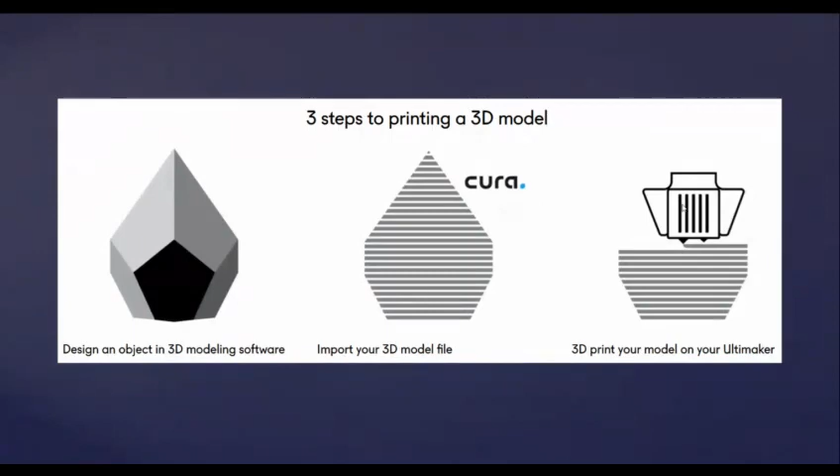Let me move on. I hope these are the basic things of the 3D printing idea, just to give a brief overview. This is one such model, a model of one 3D printer I have.

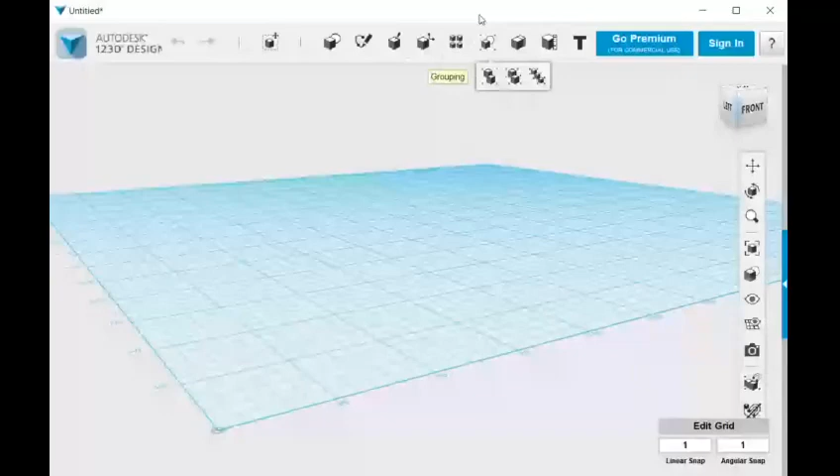So this is the software. I'm not sharing my entire desktop because it's full of windows open, and I don't want to create a mess in the webinar. So I will share only the file that is required. This is actually a software for CAD, computer aided design. It's a free software where you can try it out.

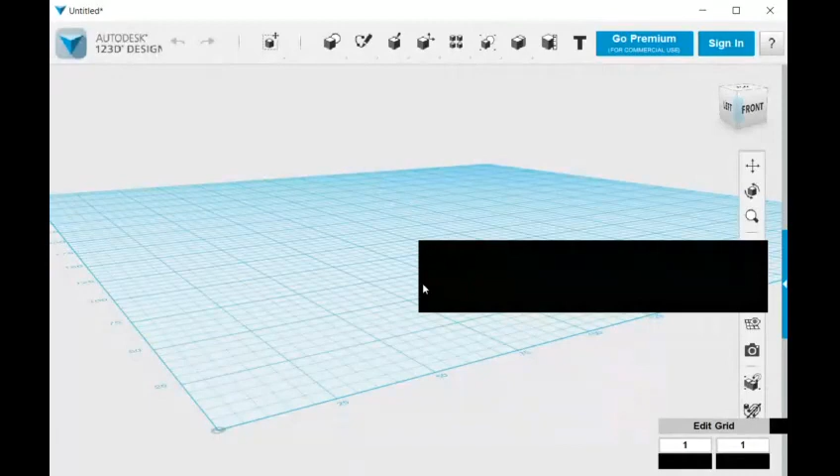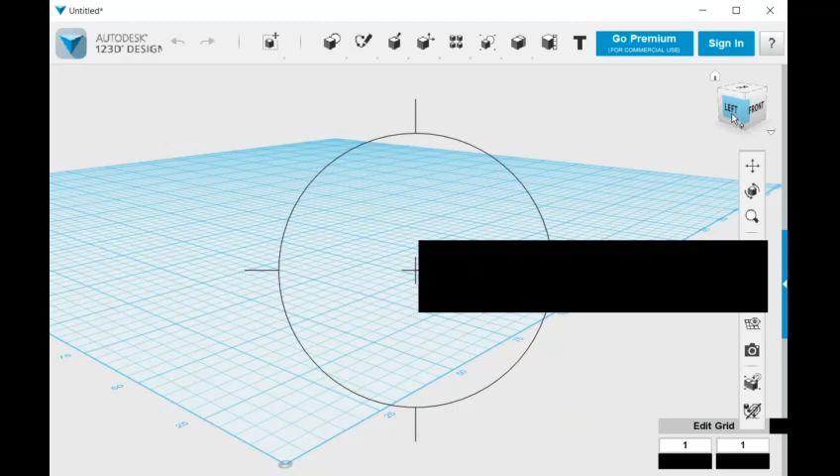If you see this, we can see there's a small cube here. I hope my mouse is visible as well. This cube is actually the perspective view of your 3D printing model. We can have a separate session on the CAD design of a 3D model, but here I will briefly elaborate on the tools so you can manipulate the STL files you download from the net. So this is the left view - if you click this, it changes directly to the left. And if you click home, it goes to the perspective view where you can see the 3D model axes.

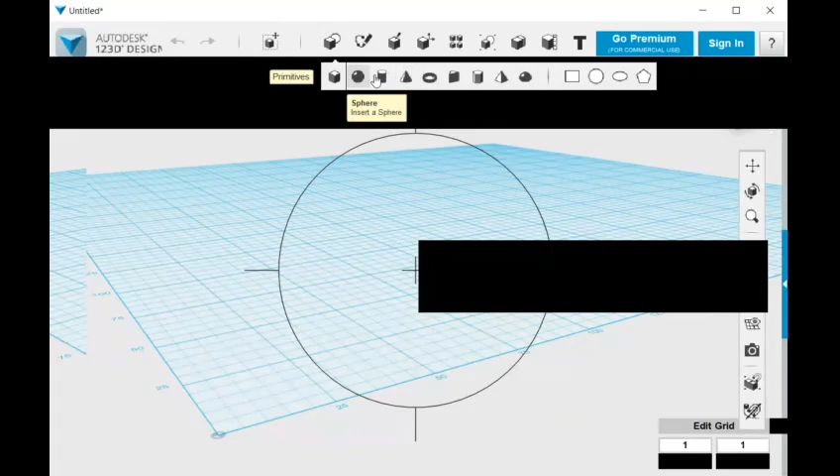These are the options where you can draw particular diagrams, like a box, sphere, and other diagrams. Let me show you a particular thing - I'll just place a box here. So here you can just see the 3D model.

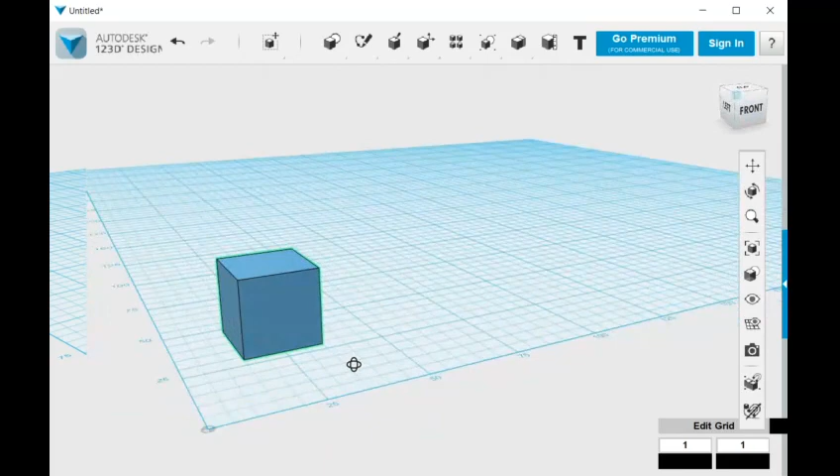The basic thing about having this software with you is that sometimes the STL file you download from the net won't be right away compatible for your application, because the dimensions used by the person on the web will be totally different. So it's not advisable to print that particular 3D model right away, because you need to identify the dimensions the person has already designed and the dimensions you require. That's the main important thing I came to experience.

The beauty of this software is that it comes with the dimensions inside as well. So if you have an STL file, first you can place it right away on this screen and check whether it meets your required dimensions. I had the experience of downloading a file, and because of enthusiasm when I learned 3D printing in late 2016, I downloaded the file and directly printed it. But after the printed material came, it was actually very small - I couldn't even place one servo motor to control it.

So that is a file I downloaded for a robot, especially a spider robot. So that is the main thing. We often make mistakes, and with the mistakes we improvise. So this is my suggestion to you all.

The next thing is that after the session, you will be able to download the STL files required for your application, from your ham project, DIY project, do-it-yourself project. The first thing I recommend is you download those files, put them in Autodesk 123D Design and check the dimensions. Once it is okay, you export this file as an STL file, or you can save this file.

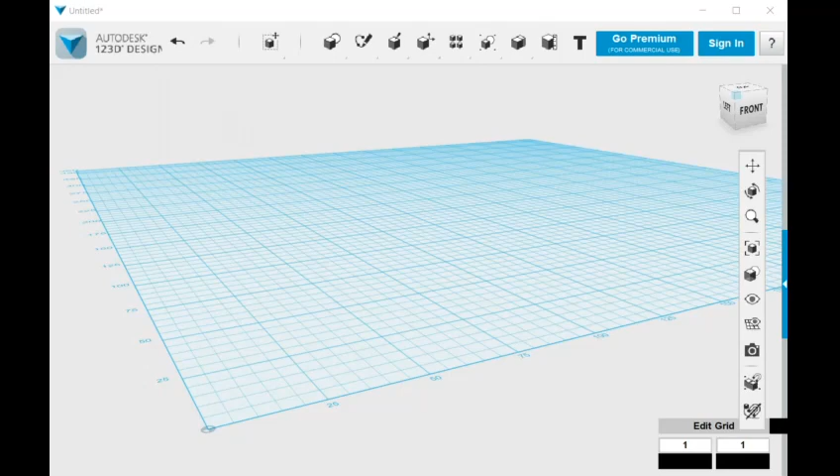So you can just click here and a window opens, and I'm going to save here. You can see that it's in 123D model format. So these are the basic things you can do. So I will just close it. I will try to copy an STL file I have. I have a Morse file. Let me check.

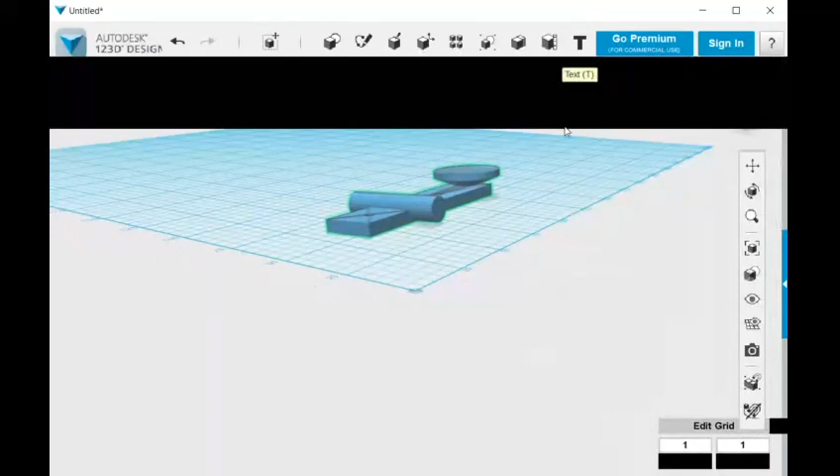Okay. So I hope you know this file. I hope you are able to appreciate what this is. Actually, it's a Morse key, the key we are going to press. I hope it is visible. So this is the Morse key where you are going to press this button here so that it moves. You can see that this file is already available here.

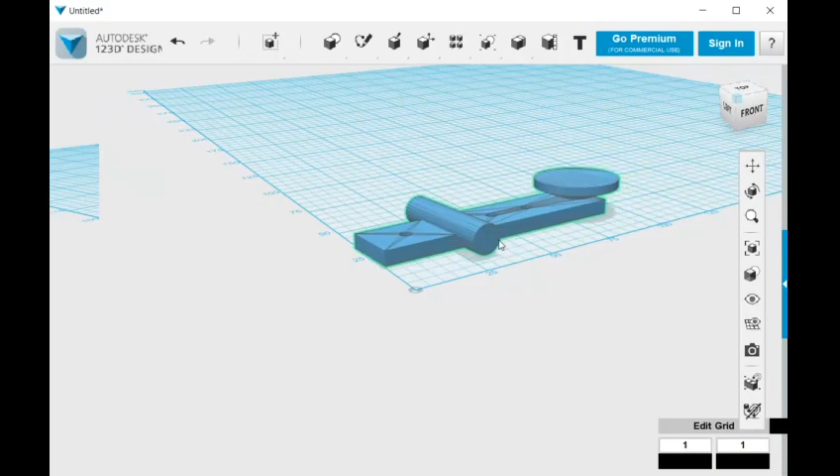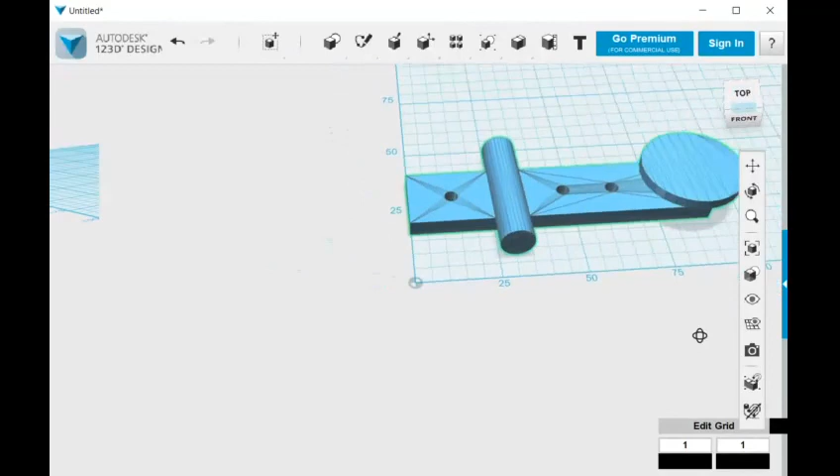If I look closely, if I place it here for your reference, this is my 0, and you can see that it's all in millimeters. You can see it's slightly above 75 here. But for the total size, if you see the cylinder, you can see the size as well. Okay, let me see. If I see the top view, I can click here as well. So you can see this is my file size. So you can measure it right away using this software.

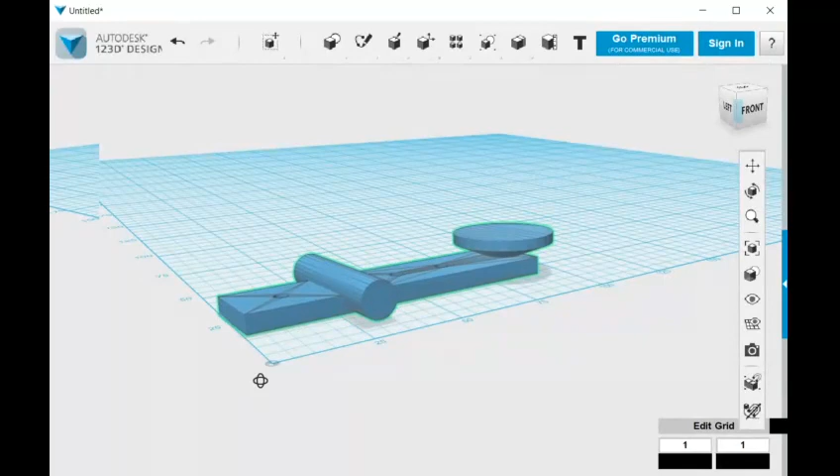With the perspective view, when you see the shadow, I thought it's only 100 millimeters, which is 10 centimeters. But if I move this closer and look at the left side, I can see that it's actually quite tilted. You can see it is quite tilted here, a small angle change. So if you move to the top portion, you can see that it's slightly above 100. So we can say it's actually 11, or 110 millimeters, approximately.

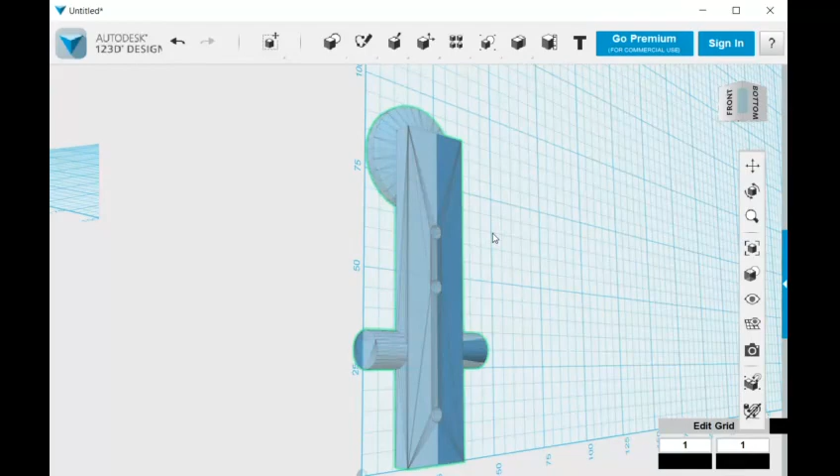So when you are going to design that Morse key, you should know that its dimension is 11 centimeters. If you are building a base which is only 8 centimeters, this won't be appropriate, because you are going to make a contact point here, and you can see it is slightly above 75. So with this software, you will be able to calculate the dimensions of STL files which you have downloaded from the net.

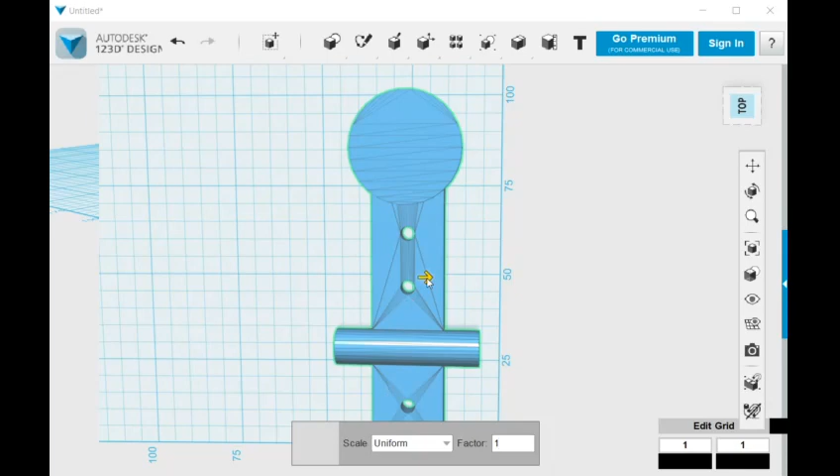What you can do is scale it. You can see the scale option here. If you click that particular icon, you can scale it. You have a lot of options where you can just click and scale. Scale means when you click it, an arrow appears, and if you drag this way it will make it bigger, and this way it will make it smaller. So this is how you can change the 3D printing structure accordingly for your project. I hope it was quite useful.

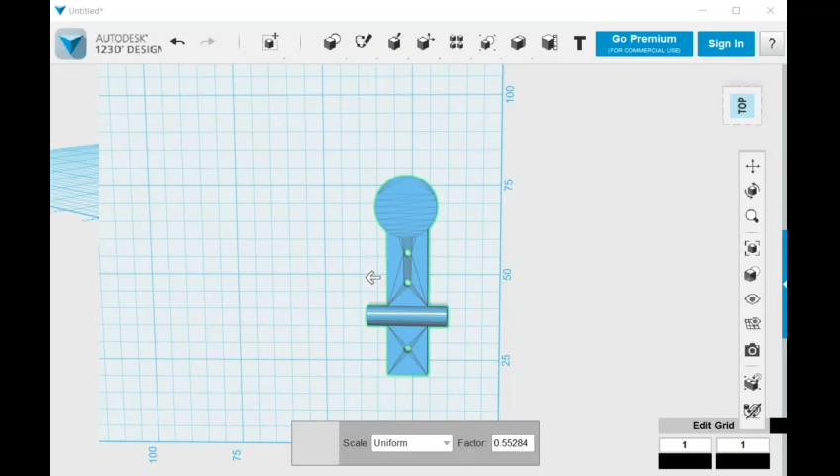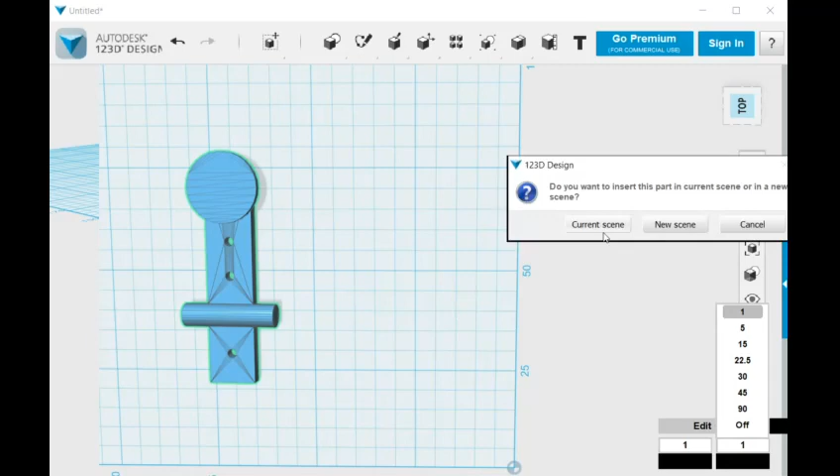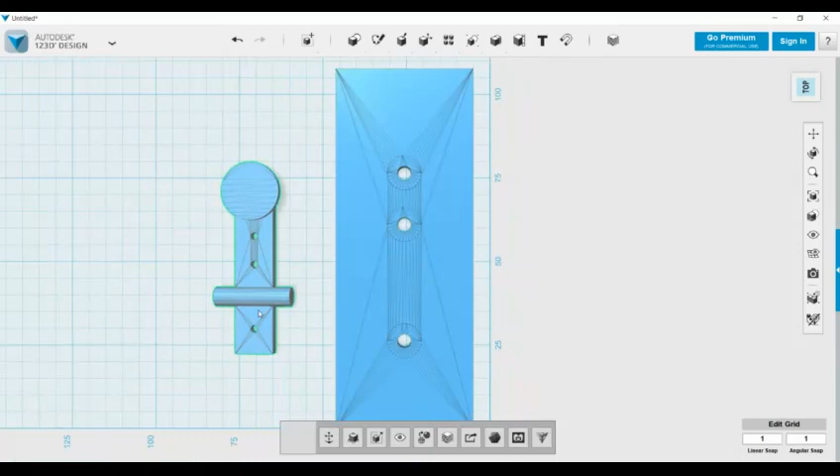This is a basic way we can use this software. I hope this is more visible now. I will repeat it again with another 3D printing model. So I will move this to the side, and I will copy the base as well. Okay. So this is the top side where I have put my base as well. Okay, since it is standard, I will put this file again as well to have a comparison.

Okay. So this is actually, I've kept it side by side in this place. So you can see that we have different holes as well, and these holes are also being matched. So what we will do is that we will print all these holes, and in these holes we will use the screw, and we will have a connector here as well. This is actually a perfect match.

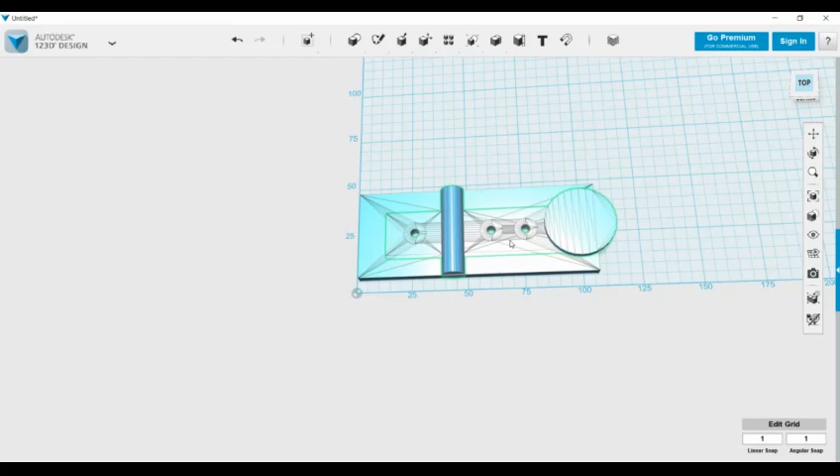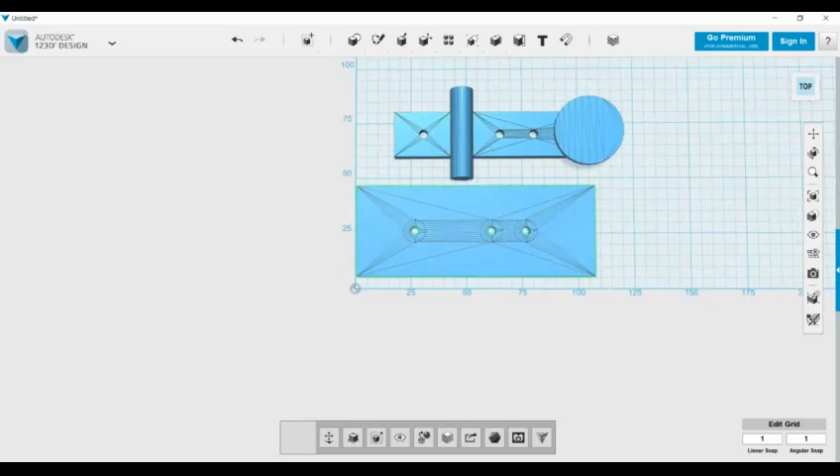Another thing is that if you are printing this model, you need to fix this plastic base over a wooden board. So if you have a wooden board which matches this size, then it's well and good. Otherwise, if you have a wooden board which is actually smaller than this size, what you can do is that you can scale it right away. I hope it's visible, or if it's small, I will just zoom it right away.

I hope it's full screen enough for your visibility. Okay, this I will put it right here, and I will just align it here. Okay, perfect. So we are placing this above this one. So if you have a wooden piece which is to be kept here, I have that diagram as well. We have already seen the 3D printed model. So if you need to place it here over the wooden body, which is actually quite smaller than this one.

Using this 123D Design, what you can do is that you can scale it. For doing that, you just click it. When you click it, a window appears here beneath it. You can see whether you can move, so the main properties will be visible, or you can scale it. Smart scale is that you can scale it section-wise. So that is another thing.

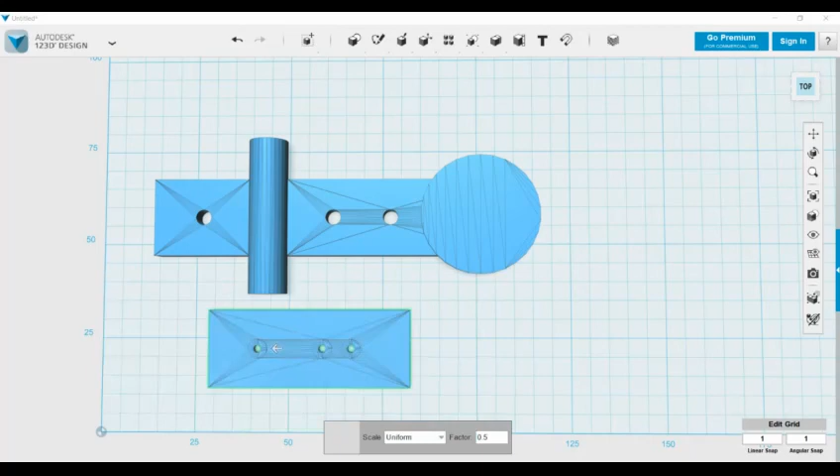If you want to uniformly scale, you can use the third option, the scale option, where you can uniformly scale it. Suppose you want to scale by a factor which is smaller, maybe half, you can type 0.5, or if you want double the size, you can just type 2. If it is 1, it means no change is happening. So you can change uniformly, or you can change non-uniformly as well, if you change the X

factor you have. What I suggest is that if you have exact dimensions, I prefer you to do this in the non-uniform way, rather than moving your mouse. If you are comfortable with that, you can move the mouse in such a way that the required dimension is met here and here. So with this, I hope you can modify your required 3D objects available from the net according to your specific needs.

I hope with this small session it's clear. I will show in the browser how to download STL files as well. But if you have an STL file, I hope it's clear that you can change that STL file to the 3D model required for implementing your small homebrewing project. If it's clear, then we will move on to Google Chrome to see how you can download those STL files for your projects. If it's yes, we will proceed with that.

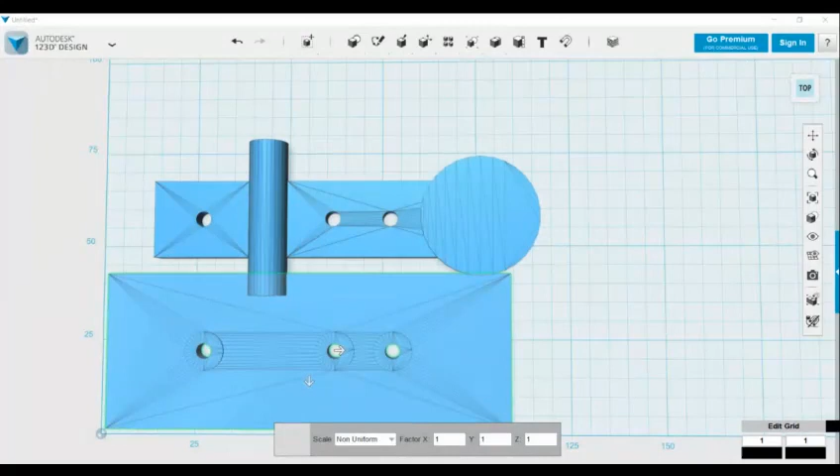Okay. So what I will do is I will share my Chrome window. Let me see. I will show it from my Google point of view. Whatever we do, we search Google, right? So I will just open an application which shows my Google. I hope you can see my Google page. Okay, it is not visible, I guess. I hope it is visible now because I can't see the software.

Okay. So here you can just search directly. What we require is STL files. So this is an STL file. You can see that we can see the STL file download. The main thing is we need to have STL files for hams, so ham radio. This is actually the common search engine that we get. This gives a general idea, or the site where you can browse all the STL files, 3D printing files for the ham radio.

Another beauty of it is that here, if you see, you have radio buttons. So if I just check it. In this session, I will elaborately explain how to search Google to find your required STL file. So here I just got a file of ham radio buttons.

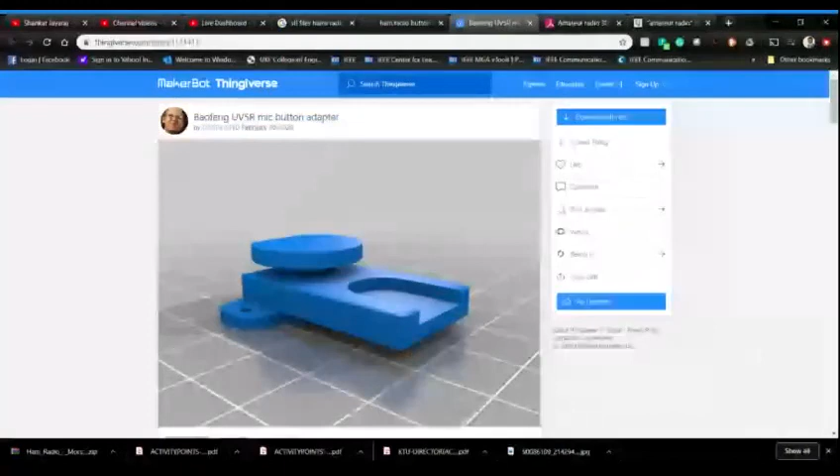So you can search many files in this web space, where you can search for the 3D printing components that are available for you. These are the basic things they have already designed there. These are the already existing components, as an overall crowdsource.

But if, in the chat window, you say that you are working on a homebrew of so and so, and you need a particular file or a 3D printing model of a particular source, then I can show you live how to search to get that particular file. If you have such, you can just comment it in chat. Then I will have a live session of how to find that particular STL file, work on 123D and how to print that in Cura. So if you put it, by the end of the session we will have that as well.

And I hope the session about searching an STL file and, with the download of the STL file, how to change the dimension according to your application, these two things are clear. I hope you can try it out after the session. If yes, then we will move on to the software printing part, where we use the 3D printing software. The software is Cura. So we will move on to that.

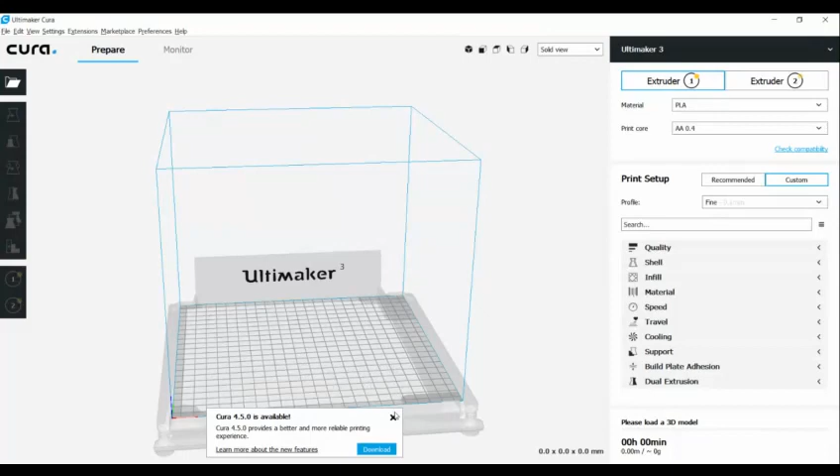So this is actually a 3D printer. You can see that I have customized this Ultimaker Cura for the Ultimaker 3. There is a different set of Ultimakers, but since I have been using the Ultimaker 3, I have set this Cura software for that one.

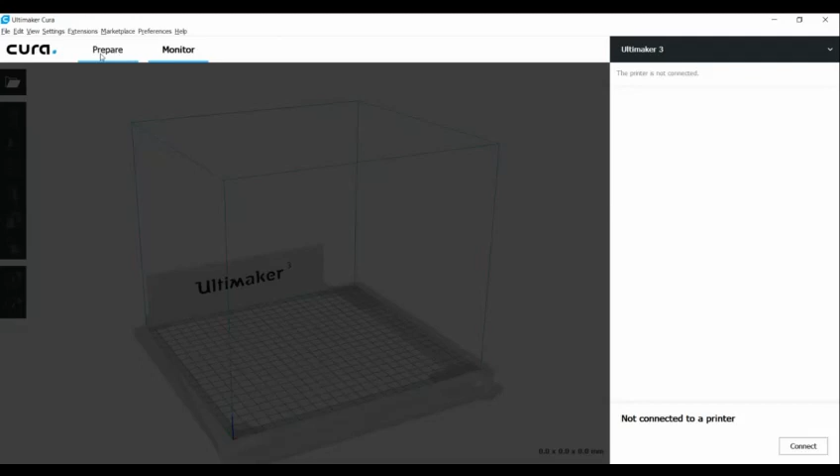So here, what you can see is that you have a right side window with a lot of features. One minute, when you switch on, you can have that option. So if you see this one, I hope it is visible. And if you see the top side, I clicked settings where you can select the printer, and I have selected Ultimaker 3. So in order to do this one, you need to add printers.

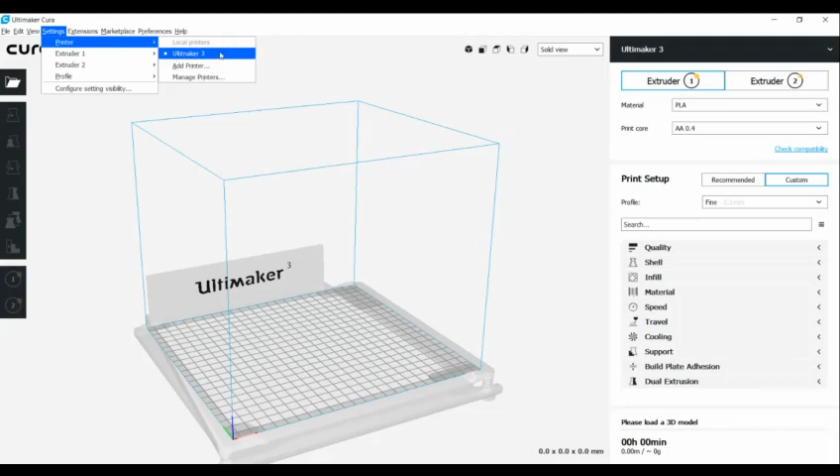So if you have a different version, you can just click add, and you have a different set of printers that is made by Ultimaker. So the latest one is Ultimaker S5. Ultimaker 3, I think it costs around 3 lakhs to 4 lakhs. And with an extra 75,000, you can get Ultimaker 3 Extended, where you get an extra dimension of 10 centimeters, so that you have a 3D structure.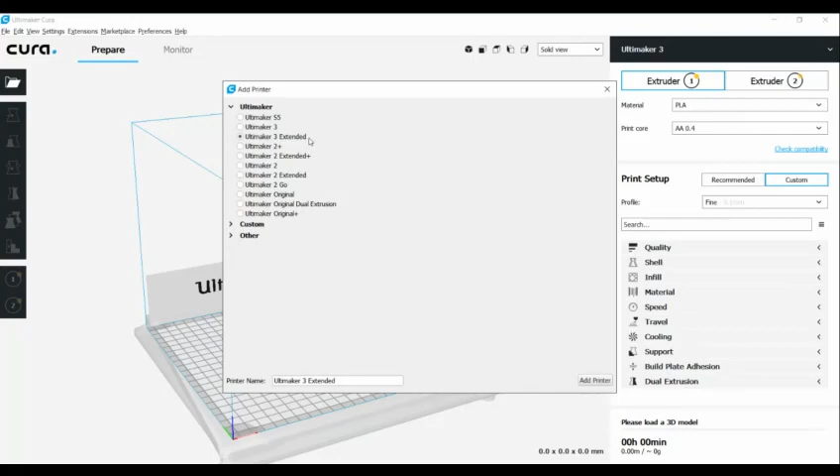Ultimaker 3 Extended means that of X, Y, Z, one varying component is Z, as its height is more, an extra 10 centimeters you get. So it costs nearly 75,000 plus over the Ultimaker 3. So today we will use this Ultimaker 3, where you use this software Cura for implementing this particular project. Let's assume that we have already designed an STL file according to our dimensions.

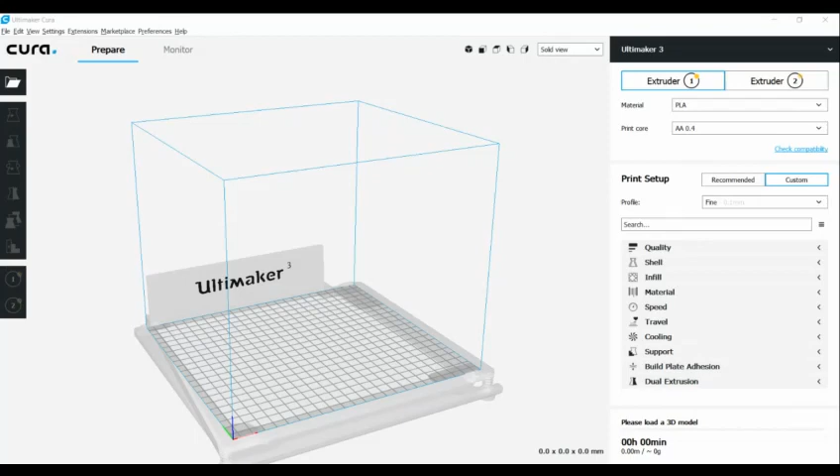So let me take that same Morse file, which I have downloaded on my Windows. I will just click and drag that particular STL file onto the Ultimaker. So what it does is that it directly takes that particular image over here. So if I zoom it, this is similar to that of 123D. The controls are the same.

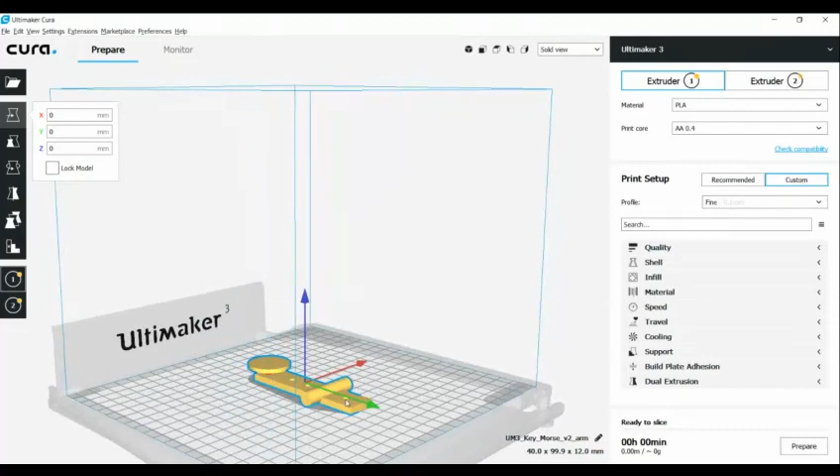You can use the right mouse key to rotate like this, and you can use the left key to select that particular thing, and you can see three axes came, X, Z and Y, with a beautiful RGB color diagram. So let's say that we have X as green, Y as red, and Z as blue. What this Ultimaker does is that if you have already placed it, and it is yellow, it is ready to print.

Suppose I move with this axis, and I'm keeping it outside the particular white area. It is not identifying the object because the object placed here is actually out of bounds, meaning out of the 3D printing area, where it doesn't identify the object to be printed.

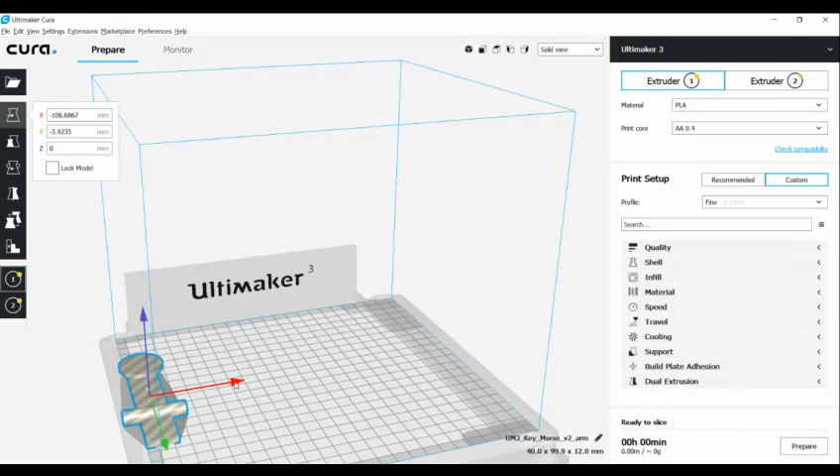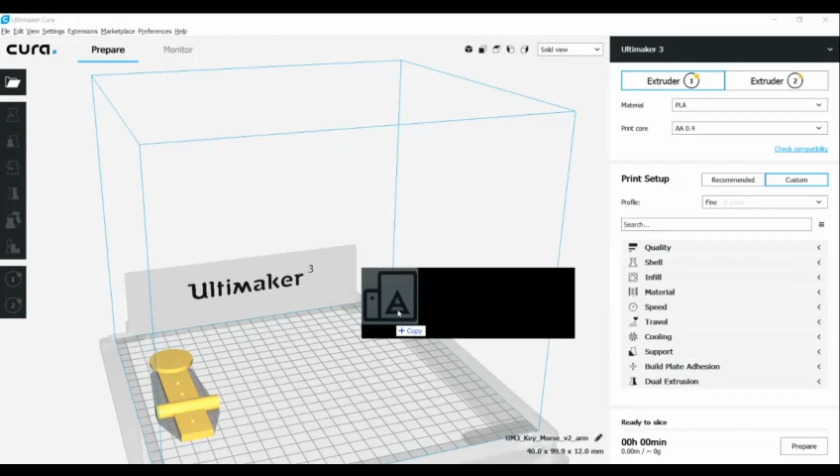So if you want to print a lot of objects, you place each object one by one. Suppose I want to print maybe 1, 2, 3, maybe 4 of these. So I will take the same file and put it again so that I can see another file also comes here. So I have kept that as well. Since I have changed it a little bit, I will use this axis alone so that each and every STL file is aligned in the same way. So I will place a lot of files.

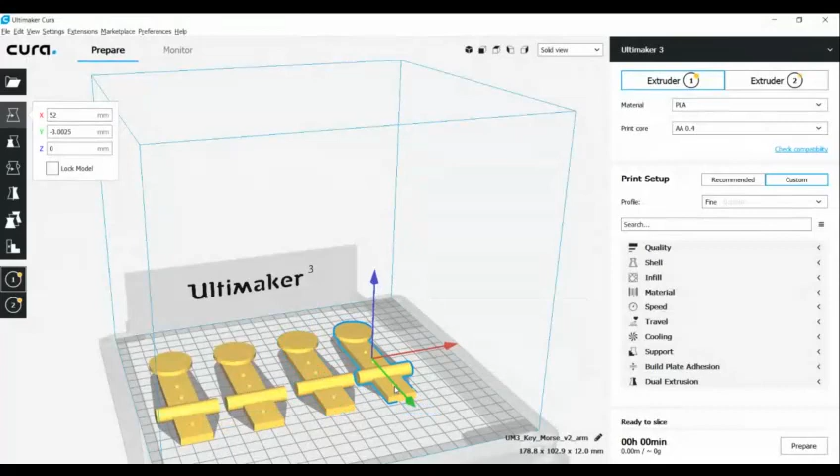So if you want to have a Morse key mass produced, or 4 of your friends have asked you to 3D print your file, you will visit your 3D printing center at the Fablab only once maybe. So during that time, you can print all these arm bases like this. Sorry, we can place these 4 arms here.

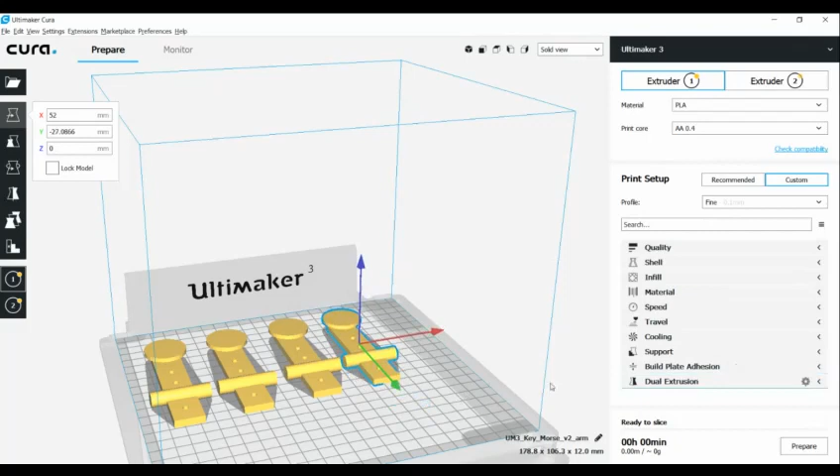If you see, we can see small spaces behind as well. So I will just put it right away so that, if possible, I can keep one more 3D printing file in the front to print right away. Since I'm having 4 arms printed, I need to have a base as well. So I've copied the base, but you can see that since there is no place here, it went outside. So I'm not able to print it.

So what I can do is move it this way so that it fits here. Okay, so I can rotate here. If I see, there is an option called rotate, where the axes are changed to circles. So we can move this according to the circles here.

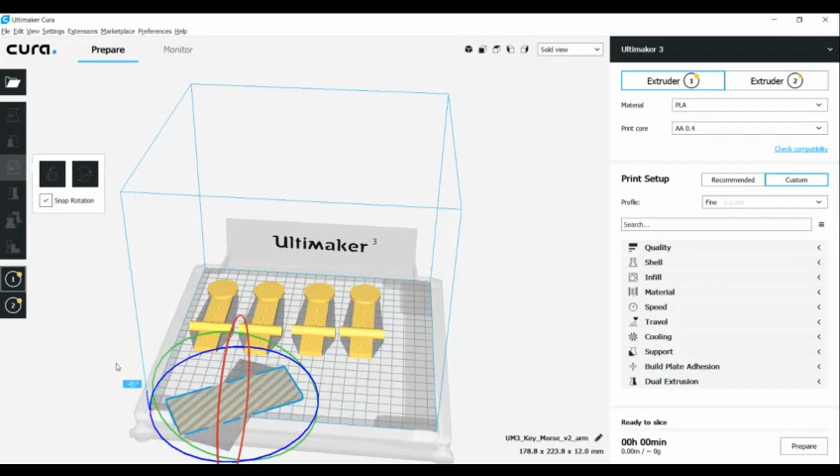So if I move the blue thing, it moves to that particular axis, and you can see it has been rotated. So now I can move it inside of this. Now this also, the base of one can be kept here as well. So this is how you place the STL file components here.

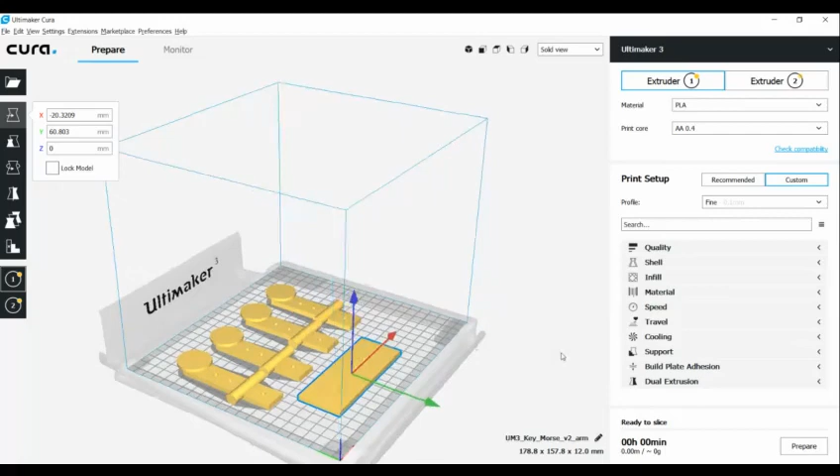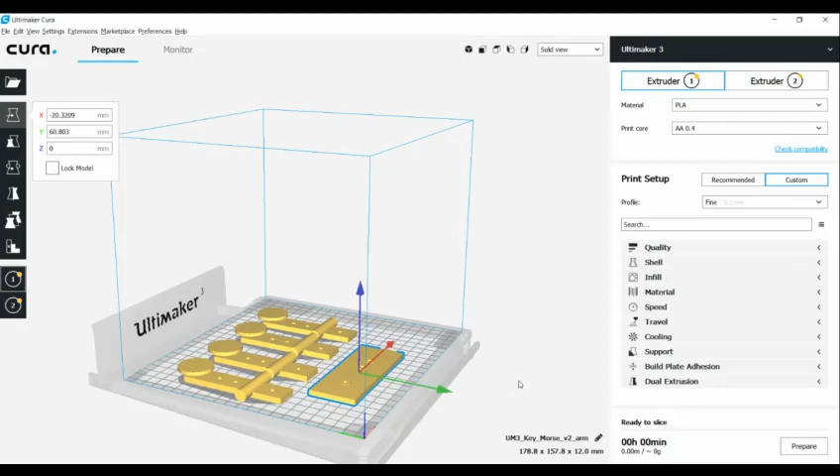I hope it's okay for you all till now. If it's okay, then we will move forward with the settings of the printer shown on the right side. I hope it's clear. So let's move on. Here you've already placed the components, and you can see we have a lot of settings.

Such settings can feel confusing, but when you see each and everything, it will be quite easy. The other thing is that if I place all these components, the time required for me to print all these will be very high.

So if I just directly select materials, let me see the Extruder 1 and Extruder 2. We have two in this Ultimaker 3. It has support for 2 extruder machines.

The extruder is a machine that takes PLA and converts that PLA into liquid form through the extruder machine. I will show you a small video of it, which will help you understand as well.

So without any further settings, using default settings, I asked Cura to prepare this 3D printing file and model. So it prepares it. Any 3D printing model can be placed here, and you can change the dimension.

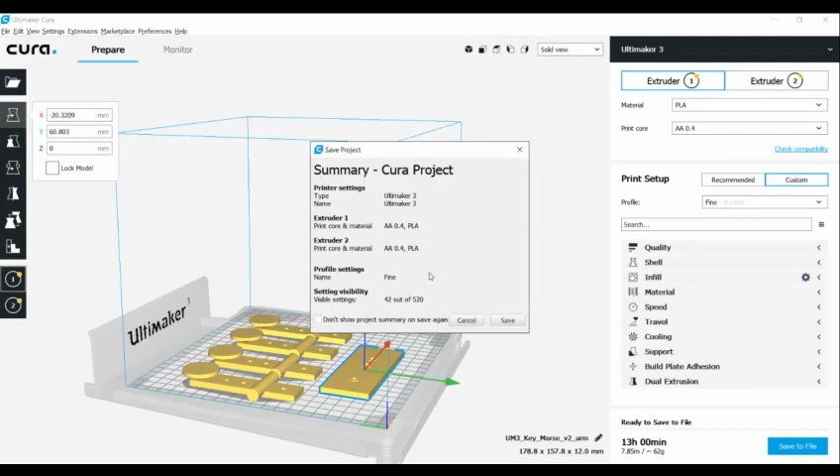Even 3D files can be placed here. This Cura software will convert any 3D files to STL files. So if you see, I can save this, save all the settings here, and I can use this file for that.

So what it does is that the STL file we have used here will be converted to a G-code file. G-code file in the sense, GCODE - this is a G-code file, where G-code is a code given to the printer's servo motors.

It has servo motors which enable the extruder to move in these three axes. So if the extruder moves in the X and Y axis, one layer will be completed. After one layer is completed, it will move a little bit up so another layer can be produced. Then it will move X and Y again.

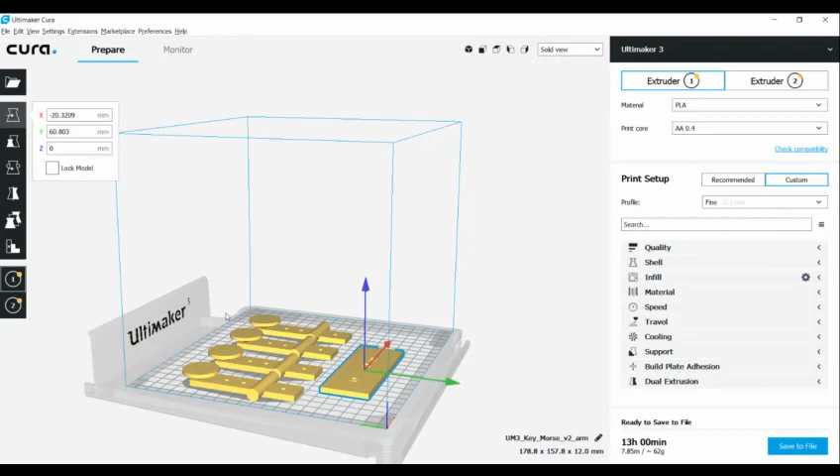So we have X and Y axis, which prints all layers, and after one layer is completed, it will move up. In terms of these colors, we have red and green axes used to cover a particular layer, and after that layer is over, we use the blue axis to move a little bit up.

But we need to know how much it should go up so the next layer is good. That depends entirely on how you map your printing profile. So you have a profile here which is very fine - you can see each layer is 0.1 millimeter.

The point to be noted, ladies and gentlemen, is that the layer is very fine - not even 1 millimeter, it's a 10th of a millimeter. So if you see a millimeter on a scale, even that 1 millimeter is being divided into 10 divisions. You can see how fine it is.

If you see an extra fine option, it is again divided into half, nearly half of that. So extra fine - if you print it extra fine and increase the layer resolution, the time required to print all the files will increase. But the beauty or aesthetics of the particular design will be very beautiful.

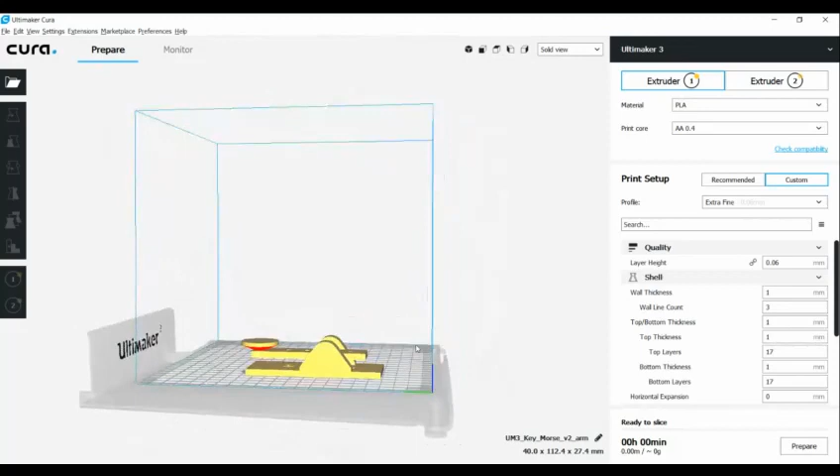I just delete this so that I can place an assembled version of this. This is actually a small assembled version of the other two, where you can see this circle as well as this type of clamp. It's actually quite a 3D size, a small block size is there.

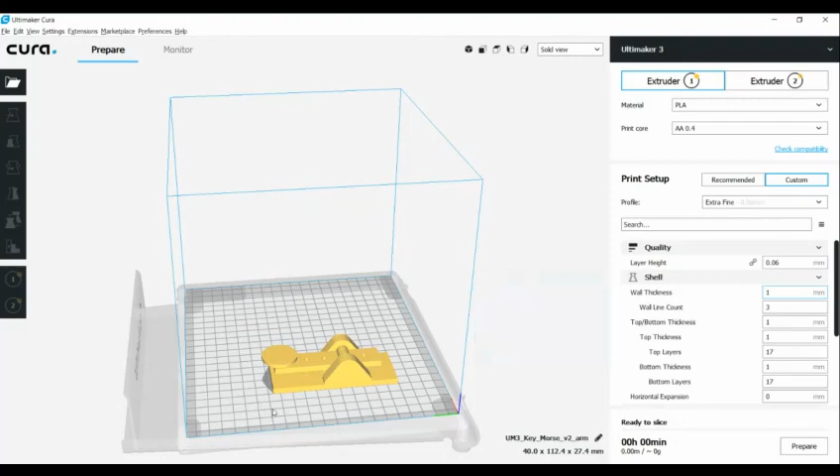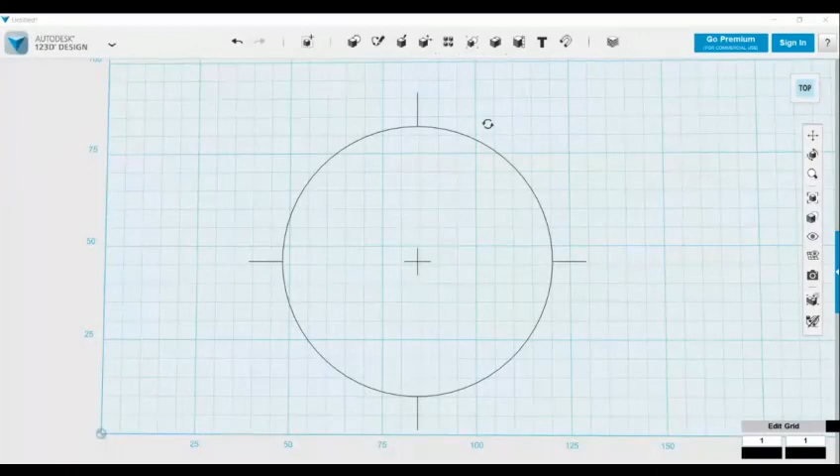Let me see. I hope you can see that. What I will do is construct a small box here, and I will show you a 3D model of that.

So if this is a box, you can just maybe change all these things. But if you see that there may be some size here, it's a 3D block. Let's say that it is actually a 3D block of size maybe 5 centimeter cube, so all sides are 5, this is 5, and this is 5.

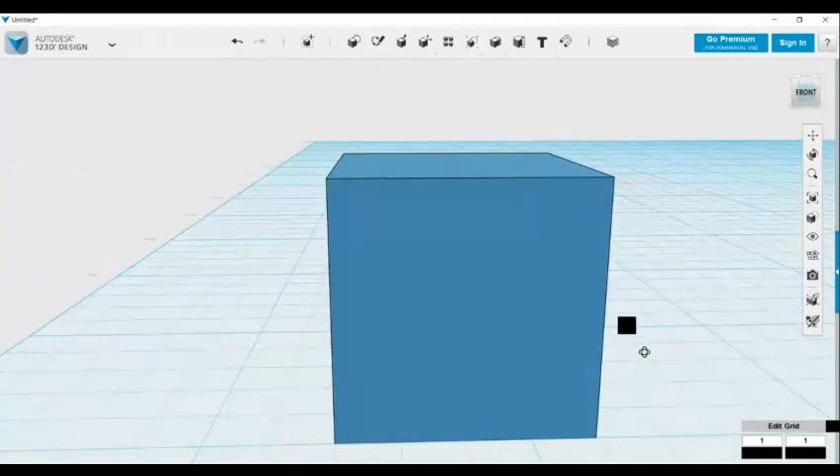So what we can do is entirely fill this full cube with the 3D printing material, the whole thing. So it will be bulky and uses more grams, but it's not advisable to use a full material to fill the body.

So like construction of a building, we will have scaffoldings where we use different wooden rods for the painter as well as the worker to climb there. Similarly, what we will have is we will print maybe a 2 millimeter thickness of wall, a big hollow box of 2 millimeter thickness, and inside that it will be entirely hollow.

But then you will ask, if we print it like that, if someone throws it or if we push it or a pressure applies, there may be a chance of breaking it. That is entirely true. To avoid that, with this 2 millimeter size thickness hollow block, what we will do is have crisscross connections as well.

So we can say that infilling percentage, if infilling percentage is 100, it means we filled the entire box with the material. But if infilling percentage is 50, it means 50 percentage is filled and 50 is not filled.

It doesn't mean that half of 50 is filled and half is remaining. It's not that. It is a mixture of crisscross lines where it supports each structure, so that if you apply pressure here, it will be distributed to the other section through a scaffolding kind of infusion here. So I will show this same thing in the 3D printing as well.

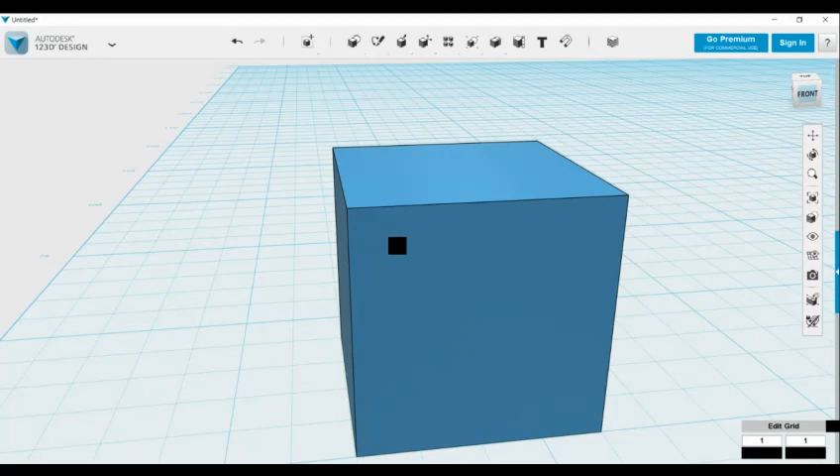I will just show it right away. I will switch on to the Ultimaker. I hope you can see here.

You can see a small diagram, I say it is 20%. So let me increase to maybe 40 percentage infilling. If we are increasing infilling, definitely the number of layers will also be high. So let me prepare it first.

So already it was 5, okay it changed to 9. To have it, I will make it fast. And shell is by default, and I will use maybe 20. And I will start prepare.

So now it's slicing, let's see. It takes 2 hours. Instead of that, I used fast and reduced the shell size. So from 13 hours, it was reduced to 5 hours. Now it has been further reduced to 2 hours. But it serves the purpose.

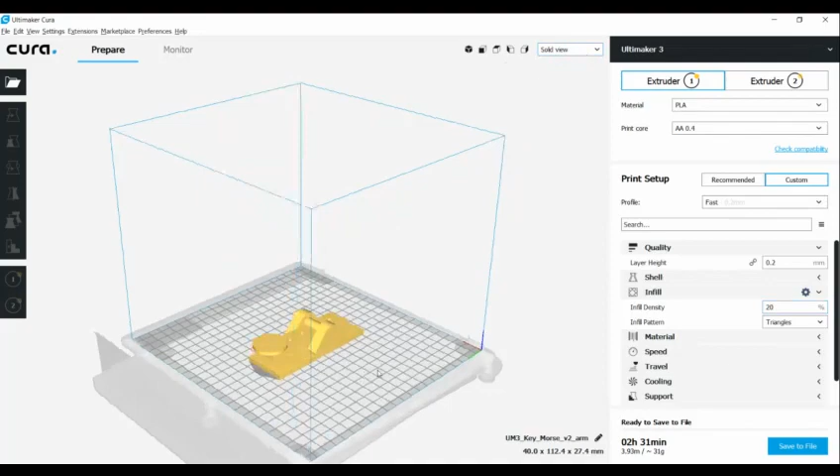So if you see here, I'm changing to a layer view here. First thing is the solid view was there, so solid view shows how it appears when you print it. So I'm now changing to the layer view. You can see each layer.

So if I click here, show travels. It shows the extruder points and how it moves. You can see the path.

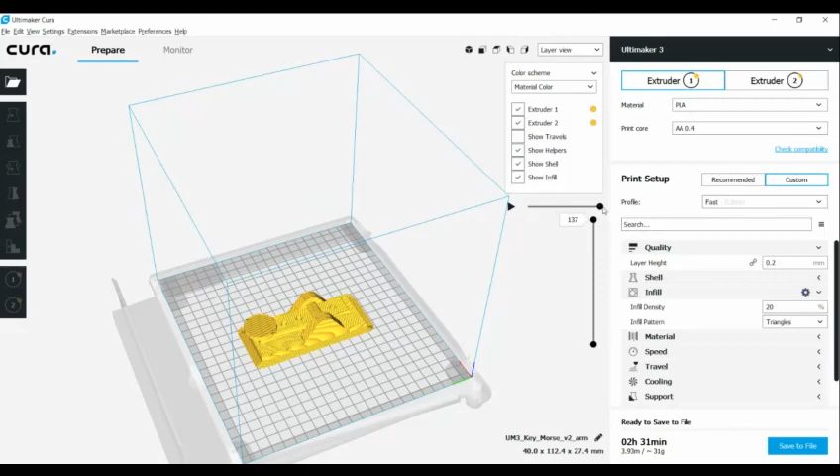So what I will do is just try to play this. Okay, this is how, if I hope it, you can see it's moving. You can see, I guess.

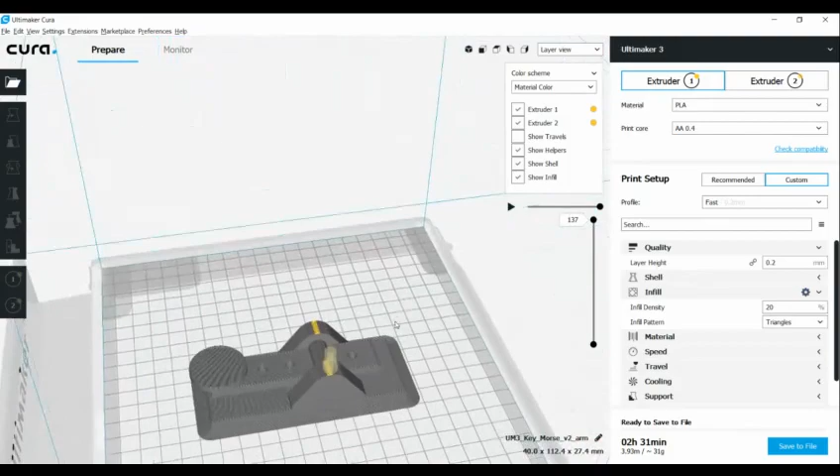So this is how that final layer looks, and now you can see the whole object. I hope it's clear now. I'll make sure it's actually a quite detailed 3D model where you can see it occupying your screen.

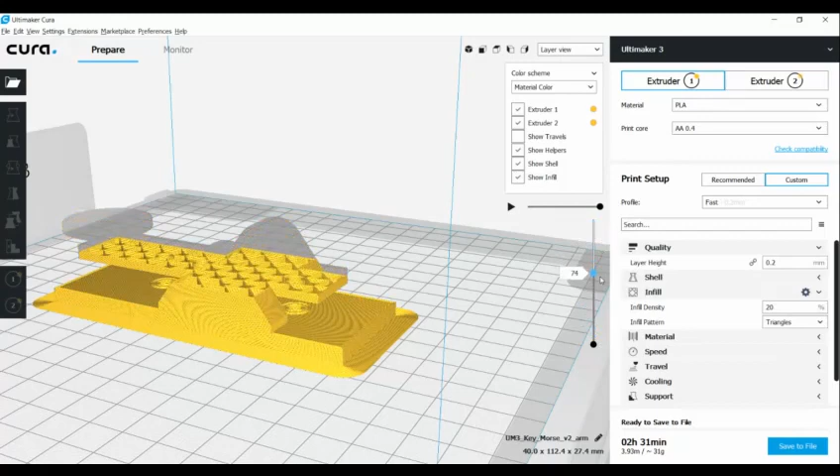So this whole thing has been divided into many layers, 137 layers. If I take maybe the 68th or 70th layer, you can see the structure of that particular 3D printing model. If I move it closely, you can see the in-between spaces, connected with small rods.

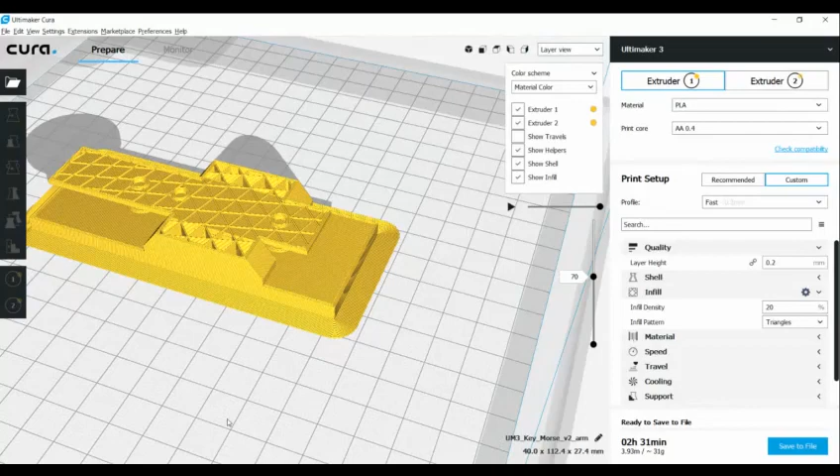So this is actually infill. You can see it's not entirely visible here, it's a small hollow kind of thing. Only a structured connection is established between two structural points so that when you apply pressure it doesn't break. For 3D printing you don't need 100 percent infill, you need only 20 percent, which saves 80 percent of your material, and hence you can save money as well.

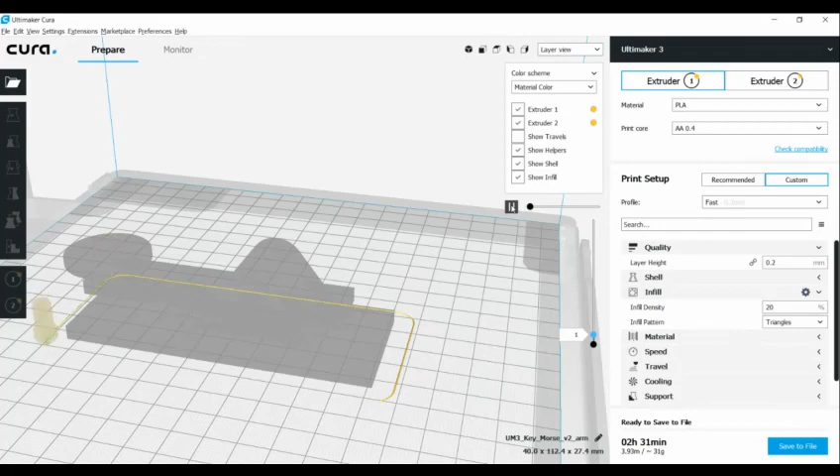So let me see how it happens. This is the first process. If I quickly increase that, this is how the extruder moves, how it prints each layer. It is fast at certain points, and only at that point. When it moves here, it prints like that, I'm moving very fast. It kind of covers this, and this is our first layer, this is how the first layer prints.

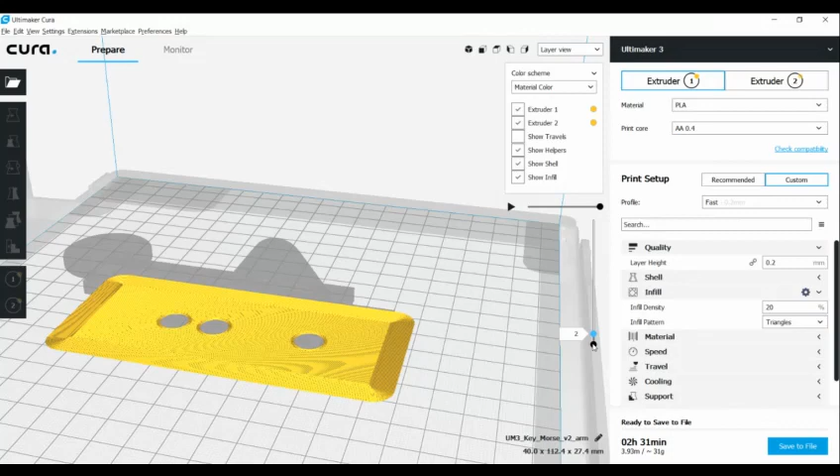Next it moves one step up to the second layer, which is actually a 0.2 millimeter addition. So the second layer is being printed here. If I move forward, it prints like this, then finishes here, and the second layer is done.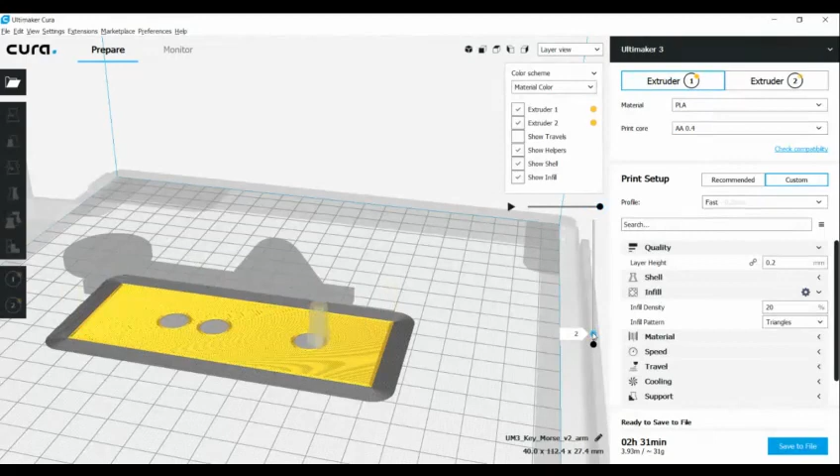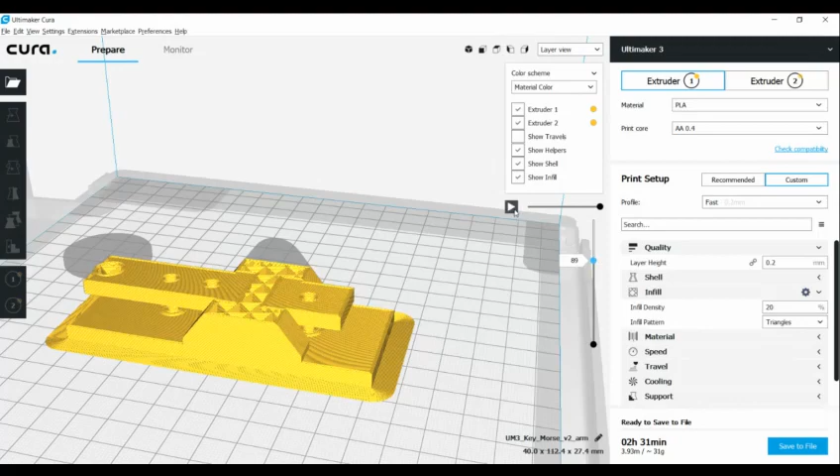So let me see how it works. This is also how it prints, that particular section. And if you see maybe layer 30, let us also see layer 131. So this is how it prints as well.

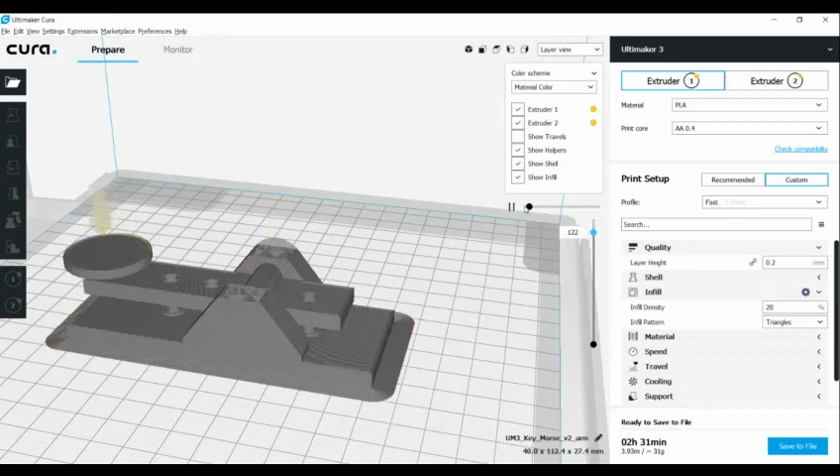So let us see the circle area as well. There it shows it printing a circle, then you can see it has switched from the circle to the body part. There is a slight jump here. I can show you this prints, and it directly jumps there. That jump is actually the speed of travel.

Next, we can also define the speed of travel here. This is how it gets printed, and you can see there's a hollow in between, since we used only 20% infill to print that particular thing. I hope this is clear. So this is how we print, and the actual printing takes about 2 hours.

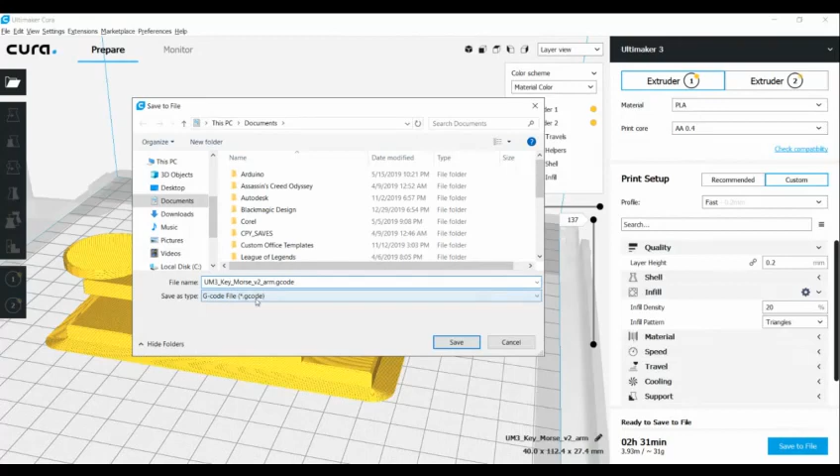So you can save this file. If I click it, I can save this file, and you can see I have converted the STL file to G code. I will save this G code to the pen drive supplied by the Ultimaker, copy the file to the pen drive, and connect to the Ultimaker.

It directly dictates the same file name that I used, so it's mandatory to use the same file. Why? Because if you have a couple of G code files, you need to identify which one you're going to print. If you don't remember, or use random numbers, you won't know which STL file to print if you have several in your pen drive. So it's always better to use a file name without spaces, using underscores instead, to avoid further errors. Once saved, this file is given directly to the printer to print.

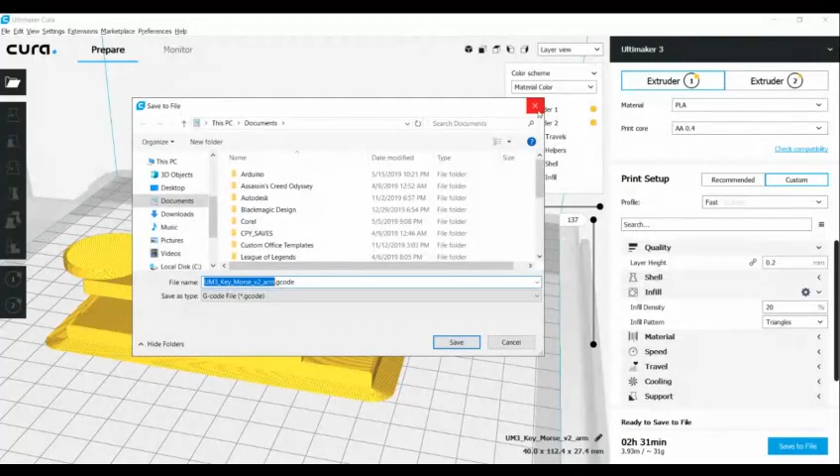So I will repeat the three steps. First, you design a 3D model with an STL file, and with that STL file, you put it into the Cura software. If you are using Ultimaker, which is used by all the Fab Labs around India, with that Cura software you will be able to save with all the specifications, including the G-code required for the printer to understand the X, Y, Z axis of the stepper motor for printing that particular material.

I hope with this session you are able to understand the basics of 3D printing. If time permits, we can continue with that. Otherwise, we will follow up.

So there is a different set of 3D printers used for ABS printing. Naturally, for all 3D printing facilities, we commonly use PLA, but we can use ABS as well. I hope we have covered the basic things of 3D printing, especially for hams. If you have any further questions, I'll be happy to take them.

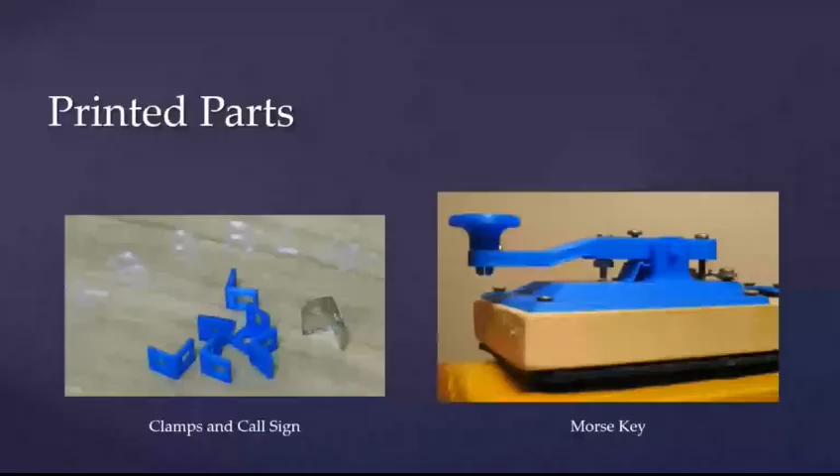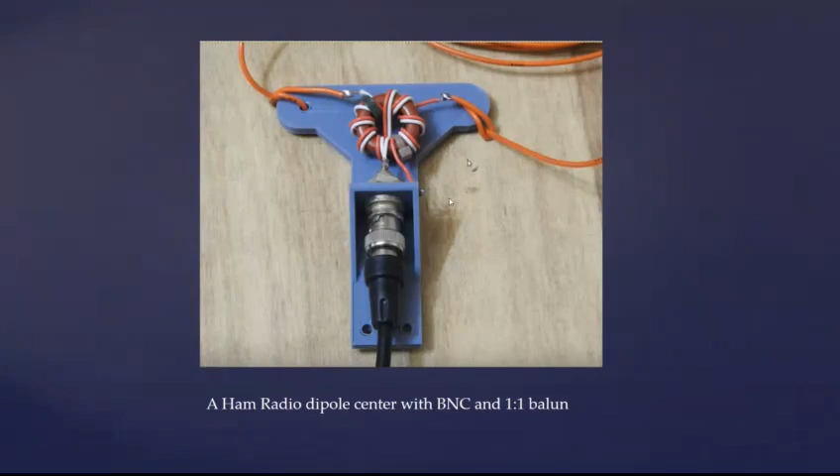So naturally these two are the commonly available printers in industrial settings, where if you're able to rent a particular thing, this is the basic setup. As you asked earlier about materials here...

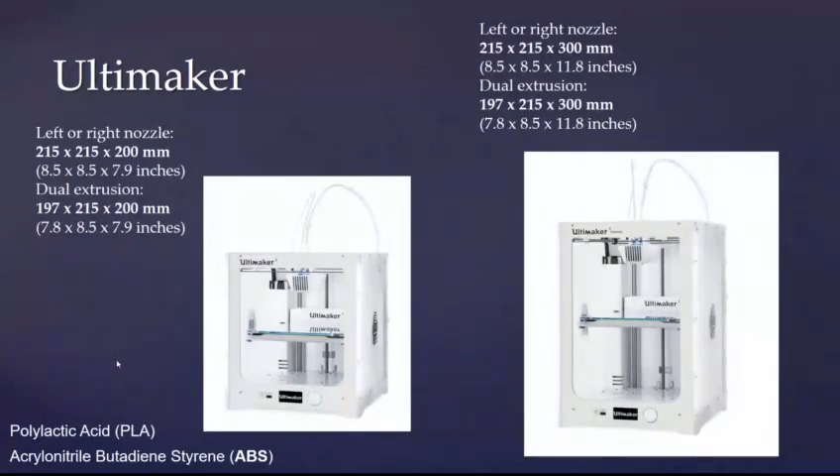Just to recap, the software I used is Autodesk 123D Design, and the printing software I used along with the AutoCAD design is Ultimaker Cura 3.0. This software is used for Ultimaker 3D printers. So if I'm using a Canon or HP printer, I need to use software compatible with HP or Canon. Similarly, if I'm using an Ultimaker printer, I need to use the proprietary software provided by the Ultimaker company, which is Cura 3.0.

Since in Kerala we have a Fab Lab, we can visit the site, and I hope other states have a similar kind of website. So what I will do is quickly show the website as well, so that you will know how to operate the website and how to get access to the network.

I hope I have a few questions as well. Okay, let me rewind it. Okay, materials - I've covered that. Okay.

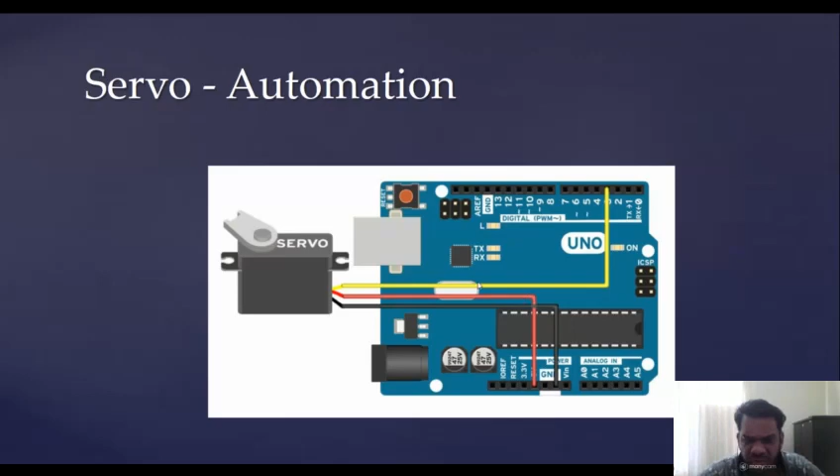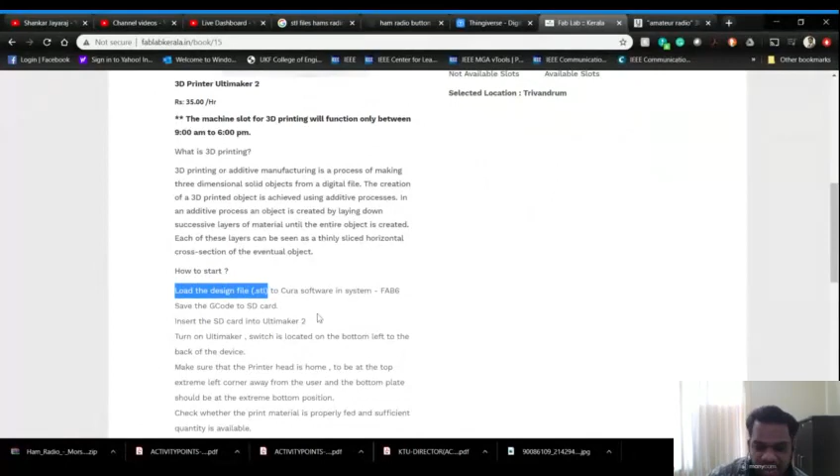Also, it's always recommended to have an STL file. That's why I talked about STL files. Because generally, when you're talking about 3D printing, the commonly accepted file is the STL file. So it's always better to convert to STL files to have better compatibility. Others also work, but if you have an alignment change in your Word document, we always prefer to convert to PDF and print, right? It ensures the margin of that particular Word document. So as we convert a Word document to PDF to ensure the quality of the print with the margin, it's always better to convert to STL files for printing in Cura. I hope I have cleared that as well.

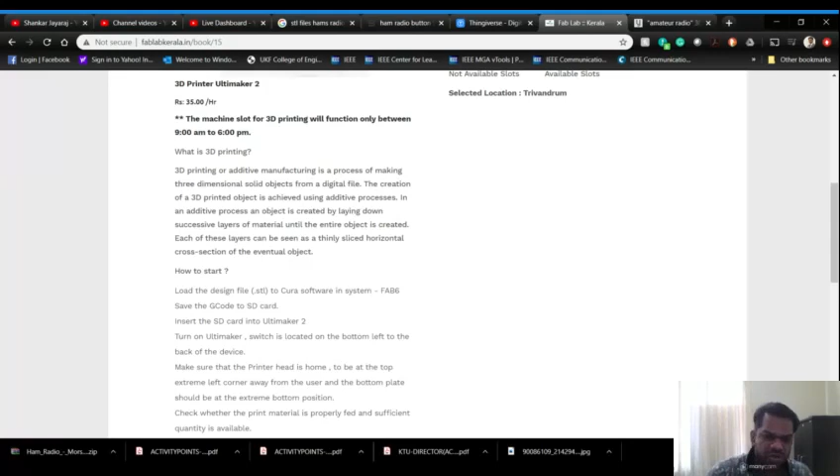So that same G-code can be given to an SD card or to the Ultimaker, and we can print that. So all steps are available there. So you can just select a date. Suppose let's say I need to book the 30th. Okay, I can select Trivandrum, and maybe I will go by 5 p.m. So I selected that slot. So once it starts, according to the files that we load, add to cart, then you can pay right away. Or you can directly contact him and book the session as well.

So this is how easy the Startup Mission Fablab in Kerala makes it for us. All Fablabs in the state have the same thing. So this is how we can book a machine and print. So you don't need to have a college nearby to print. If you have a college nearby, you can always use their resources as well, because the demand in the college compared to Fablab Kerala is less. And if you have any familiarity with them, they can do it maybe at a lower cost than Fablab Kerala. So it's up to you.